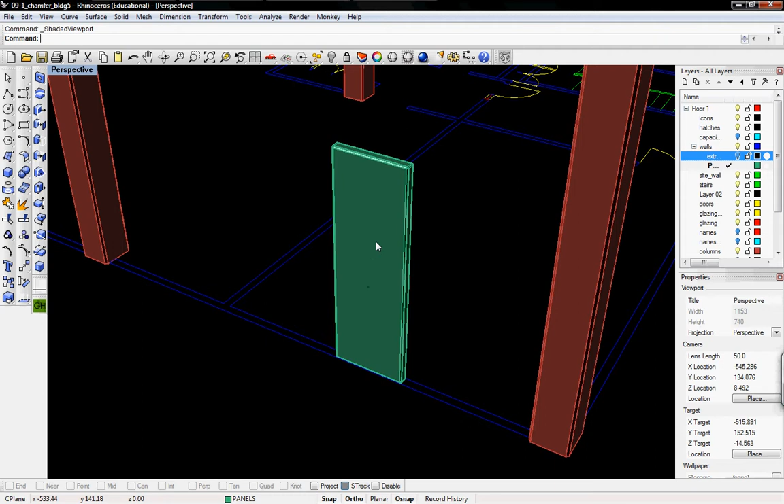So just starting off from the last tutorial, I went back and took my chamfered wall and then created a box where I wanted those joints to be. And then now I'll just select both of them and Boolean union them. So now they are one solid object.

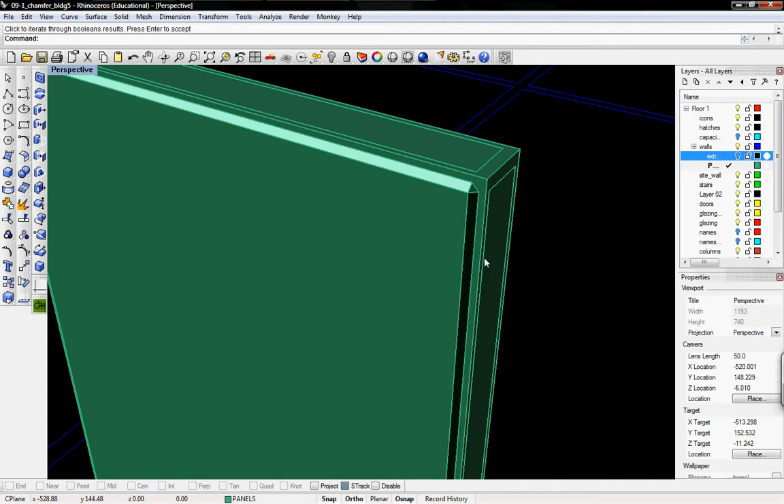And then I'll just take from one corner to the other when I want to copy. So I'll just copy this one and then place it on that one. And then I can do that as many times as I need. And then you can see that joint in there. And that's what our walls are going to look like.

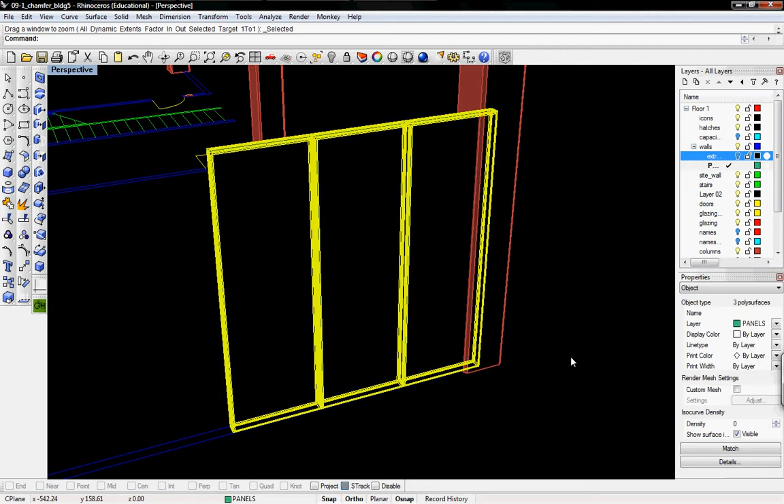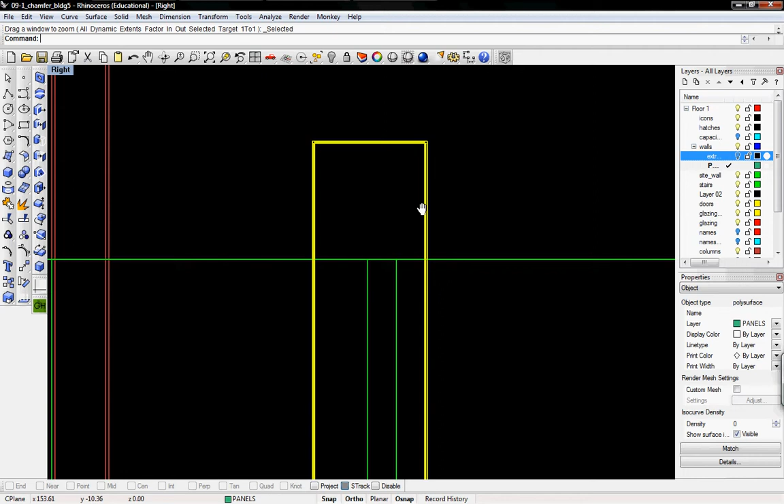So now we do have that joint, and that reveal is kind of nice, but we also want the tie joints that are created when they pour the concrete. So to do that, we'll go into the right view of our geometry, and we're going to create a kind of a grid of construction lines because we want these circles to be in the right place for all of them.

So I'll just take one line and go from one end to the other, and that'll give me a curve at the very top. And that curve I'll divide into foot long segments. So this is a 48-inch piece, so I'll divide it into 4 segments. Same with the full 12-foot one, so I'll draw a 12-foot polyline.

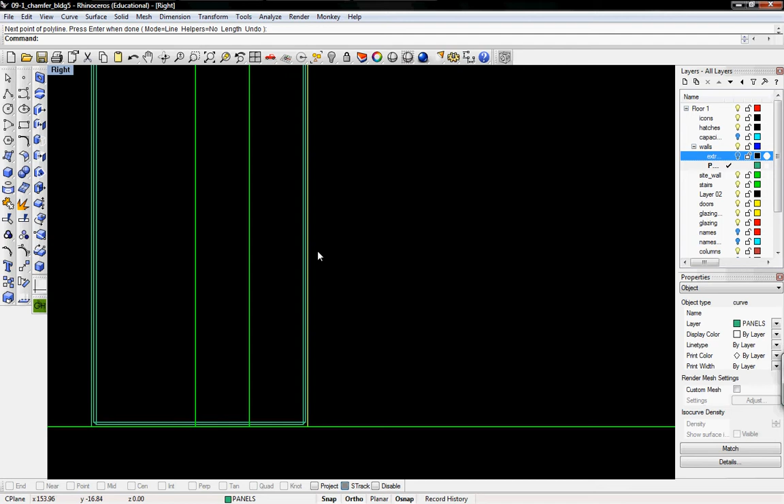So here's that curve, and it's 12 feet, so I'll divide that, and the number of segments I'll put in is 12. And now you can see that I have a whole bunch of points that represent those foot increments on this piece for me. So I'm going to go and put in a point. The first one we're going to do is 1 foot down and then 1 foot in.

So from that point, I'll hover on the point for a second and get those helper lines to come out. Sometimes you can hold down Control, and that'll do the same thing. So here's one point in, and then at the intersection of that we'll put down our point. So that's the right location.

Now we're going to create that tie. So we'll have to boolean out that area. Under solid, we'll go to the T-cone, or truncated cone, and we'll say the base is right on that point. The radius of the base will be how large it is on the outside. So it's a full inch, but the radius is going to be 0.5 over 12.

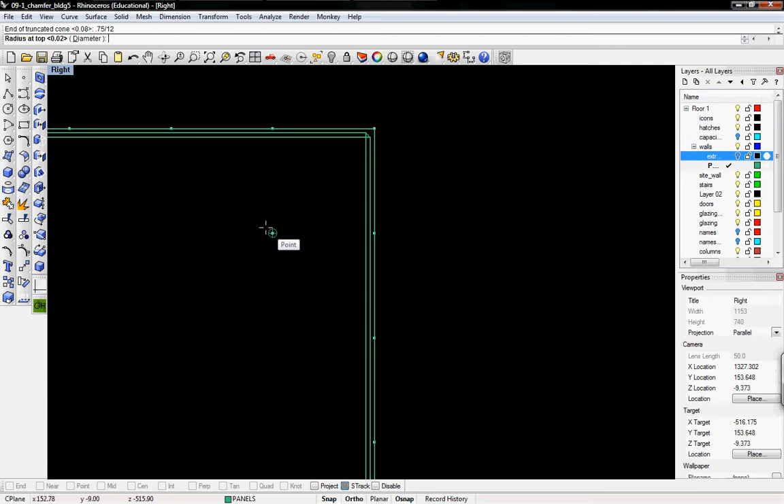And then end of truncated cone means how deep it is, and that'll be 0.75 over 12 because it's 3/4 of an inch deep. And then the radius at the top, that even smaller area, it's a full ½ inch wide, so we'll do 0.25 over 12. And there you can see it.

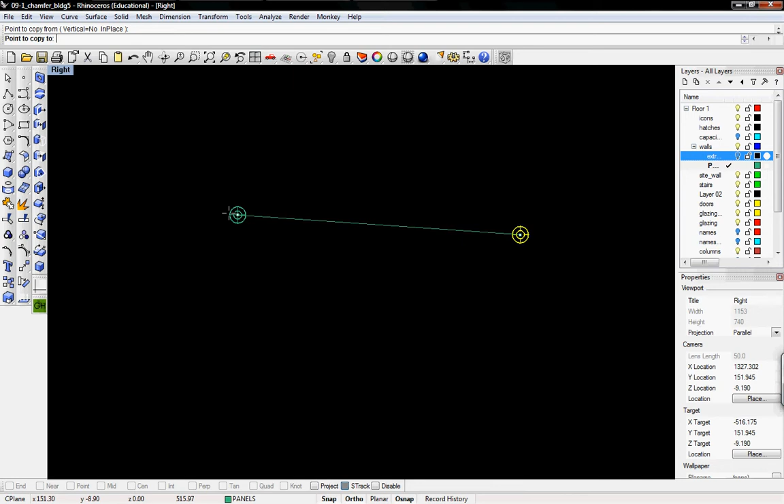We'll go back out to this size, and you can see that's what that tiny little tie joint is going to look like. And then we'll copy that and then boolean that out of our entire panel. So back in this view, take both the point and the geometry. We'll copy it from center point to its intersection down here.

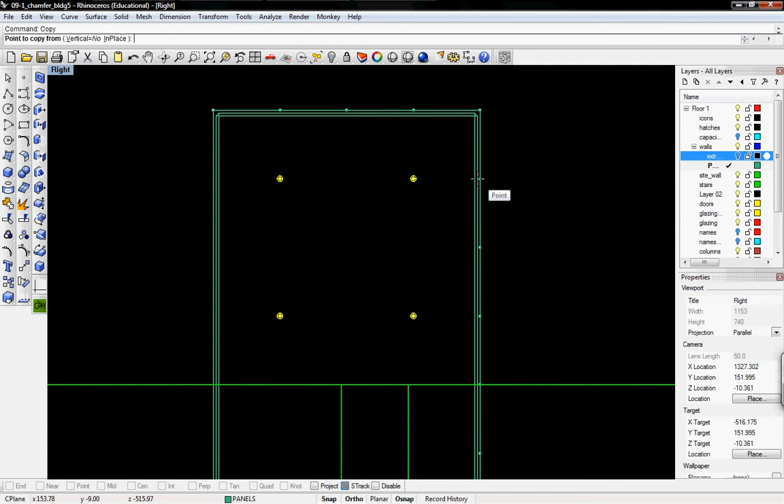And you can refer back to the image we gave of what this concrete panel actually looks like. They only poured 4 feet at a time, so then they have these ties in a 4-foot module, and then one tie 1 foot in from both directions for each module. So then I'll just copy that from point to point. So there'll be 3 copies of that, and that's what it eventually looks like.

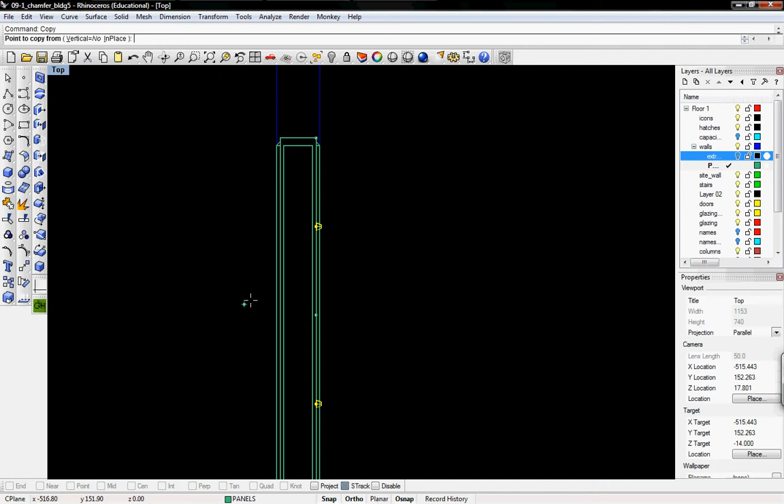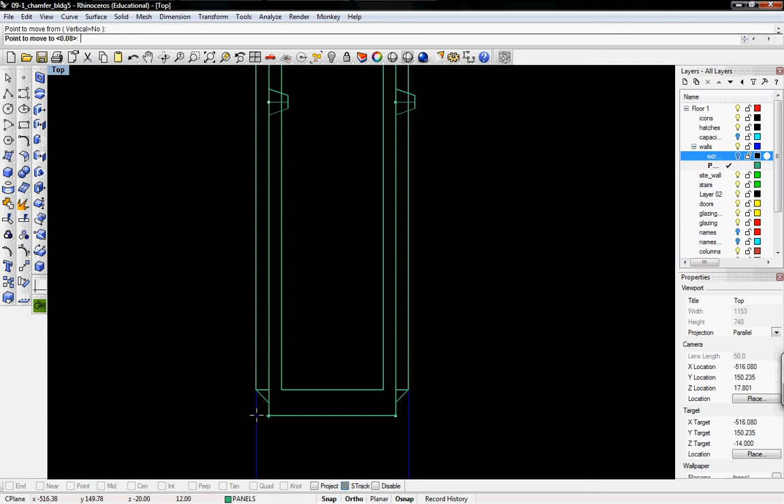So before I boolean them out, I can select all of those and then copy those once, and then I'll toggle back to the top view, and they're all on this side, so I'll just copy to the other side. I'm going to have to move these and flip one of them. So I'll move one, and I'll just move that, we want it to be on the outside one, so try not to misalign it.

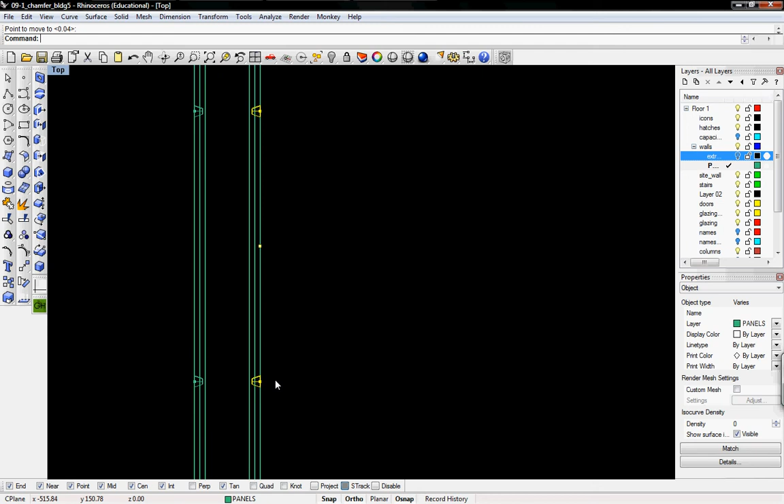And then the same goes for these ones. We can mirror them first, and then we'll delete the old ones. And then the same move command goes for these as well. So there you can see in plan, and we can go back and just delete those construction guides that we made. And then in perspective, you'll see here we have all of those points on each side in the right place.

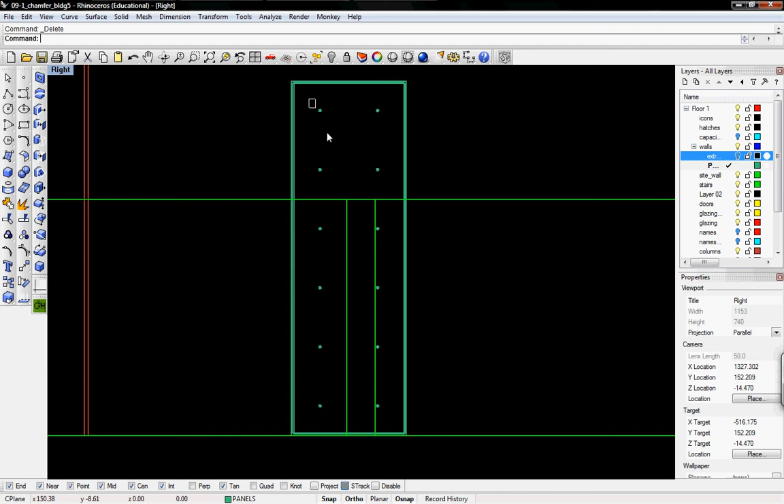Now we'll just difference them out of our full panel geometry. So I can select all of these and group them. And now I can go down to the Boolean tools and do a difference. So select the first set of polysurfaces. It'll just be our joined panel. Press enter. And then our second set, which we just grouped, press enter. And that should have done it.

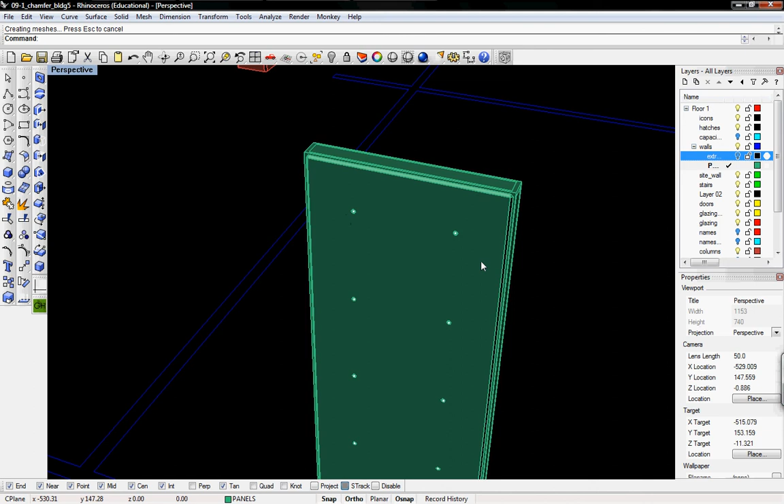So there you can see our tie joint, and you can go back and delete these points that we created, kind of construction points. And that's it. That's our single panel that we'll copy and put into place.